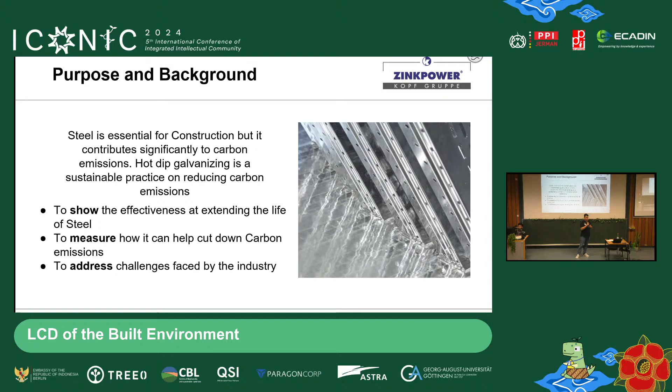So for the research, I used 2 types of research methodology, qualitative and quantitative, whereas we can see the finding implications in the built environment. So this is the key findings of my research.

There are 3 types of steel: the one that has no coating, the one that is painted, and the other one that is hot dip galvanized.

From the durability standpoint, we could always see that no coating is very vulnerable to rust and corrosion, because steel actually degrades quite fast. With a paint coating, it will still be susceptible to damage, and it is not as thick as hot dip galvanizing. The third one is hot dip galvanizing.

Hot dip galvanizing has excellent corrosion resistance. Why? Because it has a layer that can actually heal itself on the steel. Even if it corrodes a bit here and there, it will still not degrade as fast as paint coating.

Maintenance is also quite important. With no coating, it needs to be repaired often, because it needs to be replaced and then you need to make another steel piece. With paint coating, it needs to be cleaned and touched up every 3 to 5 years or so.

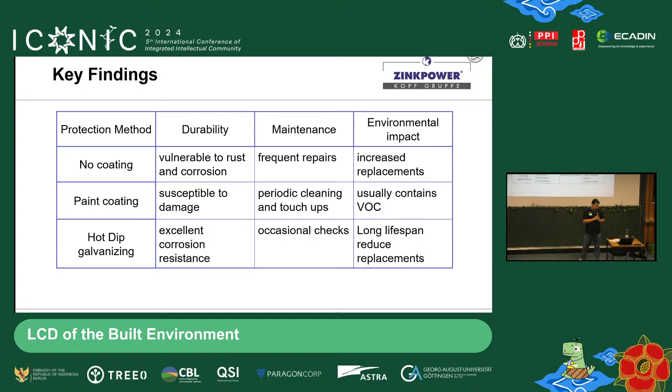And these are the key findings based on quantity. For example, with no coating, it has 0 thickness in millimeters, with a corrosion rate of 0.1 millimeters per year. It has a lifespan of 10 years, but that's only on the steel, because after 10 years it will usually disintegrate into rust.

But with paint coating, it has around 0.35 millimeters of thickness, and with a corrosion rate of 0.03, it will rust in around 10 years, but that's only the paint coating. If it's with the steel as well, it maybe lasts around 20 years before it's gone. So it's actually not as good, and after a few years it needs to be repainted again.

But with hot dip galvanizing, with a coating thickness of only 0.15 millimeters, it has a corrosion rate of 0.005 millimeters a year.

And with that calculation, it would last at least 30 years before it needs to be replaced again.

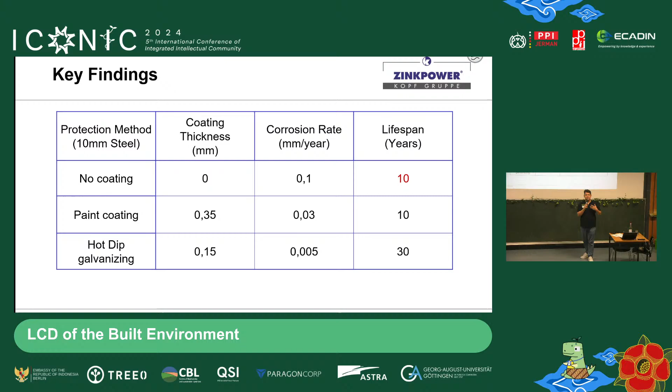Next, these are the findings and implications in hot dip galvanizing. There's quite a lot. Maybe it looks a bit similar on some points, but it is also different. For example, in reduction in emissions, because it does not have to be painted again and again, it doesn't require a lot of maintenance where people have to come paint it again or touch it up, but just leave it alone and it will stay.

And the other side is recyclability. Zinc is in abundance, and with hot dip galvanizing, 99% could be recycled. This is because of the zinc and its byproducts, like the ashes or the zinc that cannot be operated anymore, and even in the pre-treatment area where we need to clean the metals.

So all the chemicals could be utilized for different things again. And the other one is sustainable practice. It is very sustainable in the long run because, like I said, it doesn't have to be maintained a lot, and it doesn't have to be replaced a lot as well. And the other one is integration with LCD goals.

Because with galvanized steel, it's actually important for infrastructure. It is already common in Germany, where a lot of infrastructure is built with hot dip galvanized steel, rather than in Indonesia, where it's usually not galvanized or maybe just painted. For example, those hot dip galvanized steel beams are usually inside cement. If it's not hot dip galvanized, it will usually rust because of the acidity inside the cement, but with hot dip galvanizing, it will last a lot longer.

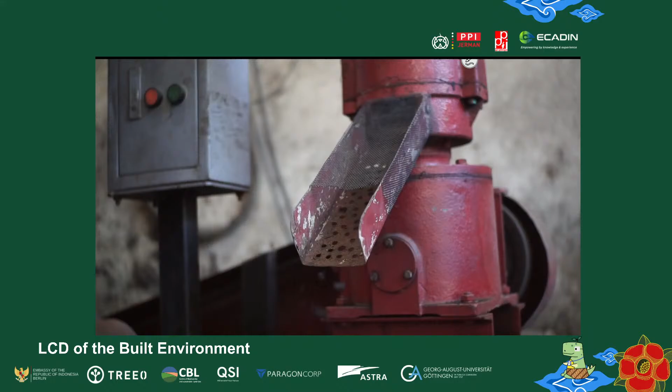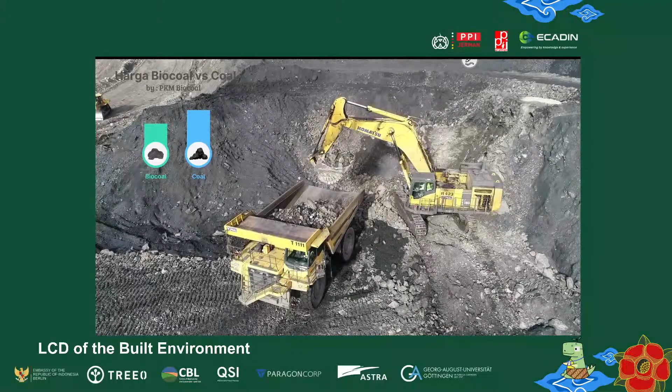Waste in the environment is a problem and a burden for the community and also for the industry, especially water hyacinth that grows around the Musi River. In addition, we have other problems, household waste that burdens the collection and transportation process to landfills. The circular economy concept is a solution to overcome the waste issue and empower the community's economy. The team is responding to this challenge by processing organic waste into biomass used as renewable energy. Biomass is processed by shredding waste and degrading garbage through bio-drying techniques with the help of aerobic bacterial catalyst for 4 days. This process turns organic waste into chips ready to be blended. Dry biomass is then blended into pellets that can be used for furnaces and charging stations. Pellets made from water hyacinths and dried leaves have high calorific value and are within the combustion rate for a steam power plant. The team conducted comparative studies, learning simulation, and finally implemented the pellets in 2024, disrupting the STG factory operational process. Pellet use is also more economical compared to the current coal price. The spirit of empowering the circular economy for the surrounding community with renewable technology is a mandate we must uphold for the earth and the future of our grandchildren.

Thank you, it was a really nice presentation. So essentially, the presenter was making biocharcoal, or in Bahasa Indonesia arang, from the organic waste around the industries, especially Pusri, which I think is located in Palembang. Is the presenter at the online session?

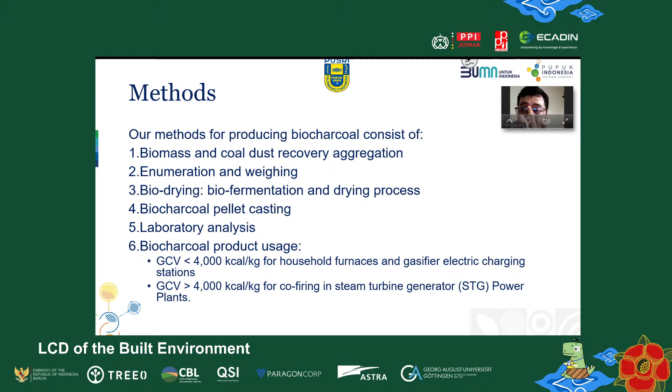This is one of the methods I mentioned before. It usually takes around 3 days for the bio-fermentation process, and in total we have about 5 days for the total production of this biochar.

This is one of the examples of local communities that made this biochar, usually made by aggregating water hyacinth from the Musi River and also dried leaves. We usually use only the leaves of the water hyacinth because it gives us the lowest moisture among all.

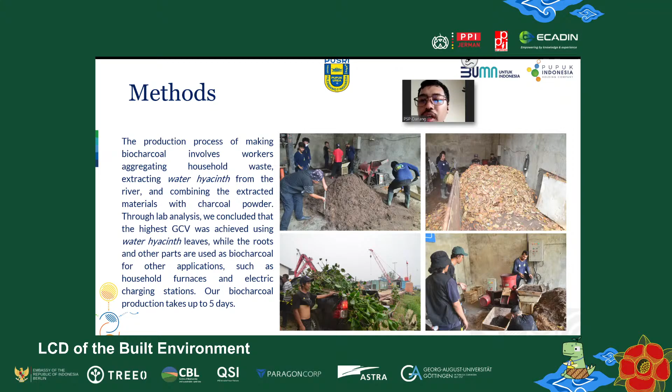This is one of the key methods we use in the process: laboratory analysis. We have to make sure that the GCV, or calorific value, is above 4,000 kilocalories per kilogram.

This is the result of the biochar we made. As you can see, we made a pellet of this biochar, and we use it for household furnaces for the GCV less than 4,000 kilocalories per kilogram.

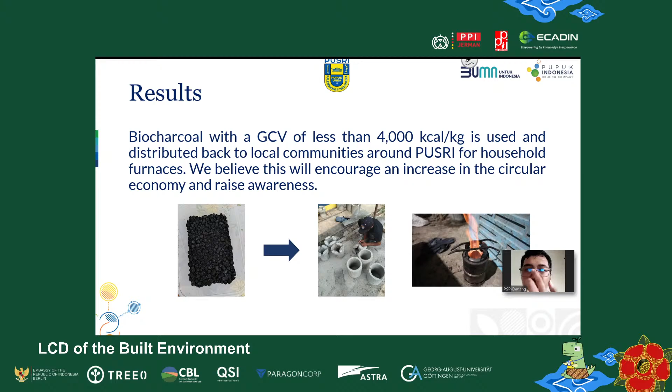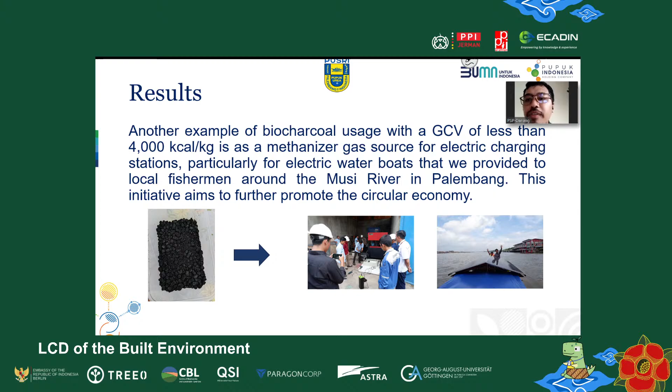This is an example of the gasifier electric charging station we use, which we give to local fishermen, a gasifier electric charging station. After that we also have the STG power plant for the factories. That's it, because our time is up for discussion.

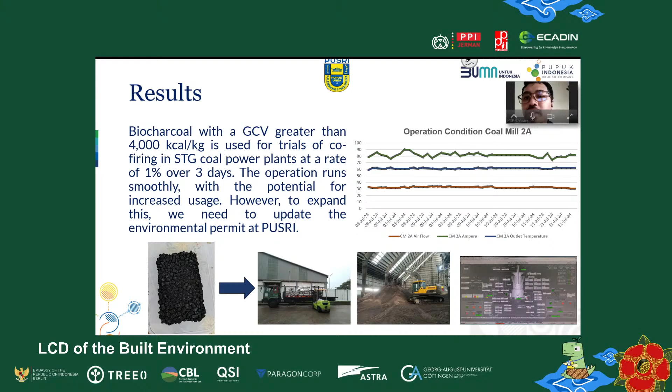So to conclude, I would like to say that we have made little less impact, but we still have impact that we make. We make usage of 1% in our production facility using this biochar, and we save around 244,800,000 rupiah per year. We will continue to empower by maximizing our output capacity by this pulverized coal STG power plant by 5%. We are also the first fertilizer company in Indonesia to utilize biomass made from agricultural residues for co-firing in our STG power plant. I think that's all for my presentation.